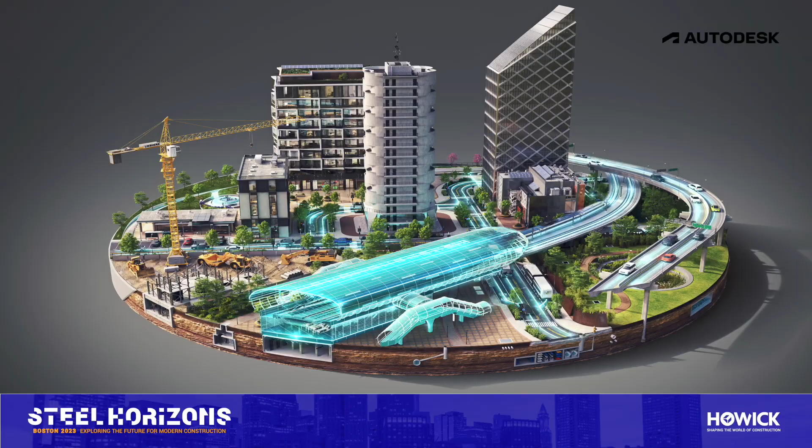Autodesk is changing how the world is designed and made. At Autodesk Research, we advance this mission by exploring new possibilities where others might see roadblocks. We are a diverse team of scientists, engineers, and industry experts, and we conduct industrial research to help our customers design and make a better world.

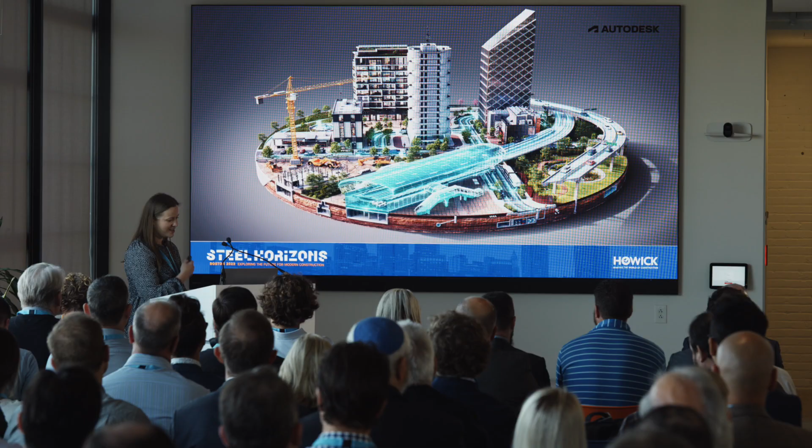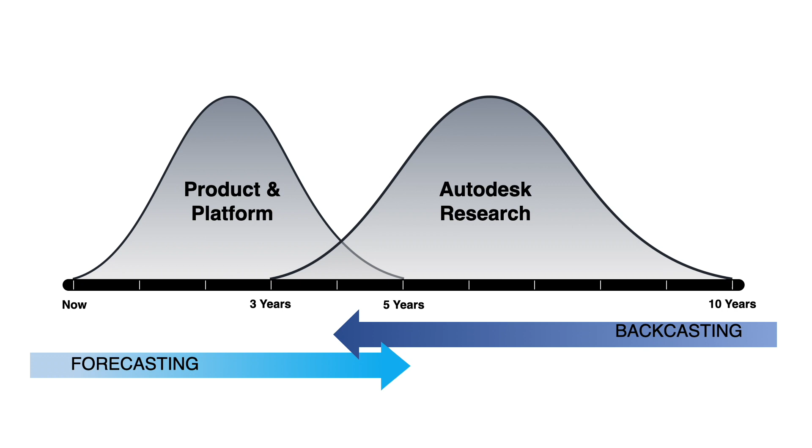So how do we approach innovation at Autodesk? Product teams are focusing on what our customers need now, working on a 1 to 3 year timescale. At research, we're setting our sights farther into the future, looking 5 to 10 years into technology which might still be far from widespread adoption. We use a process called backcasting, where we speculate multiple futures and then figure out the steps we need to take to meet the most desirable one.

In this research, we have multiple groups. Science groups develop new technology and engage with industry, technical and academic communities through papers, patents, and prototypes. The Industry Futures team, which I'm part of, takes the technology from the labs into the real world, working with customers on applied projects. These projects are never easy, there's always some workaround to be done, but the end goal is to produce a proper workflow for our customers. Then technology centers support external industry research, and we are in one of those downstairs.

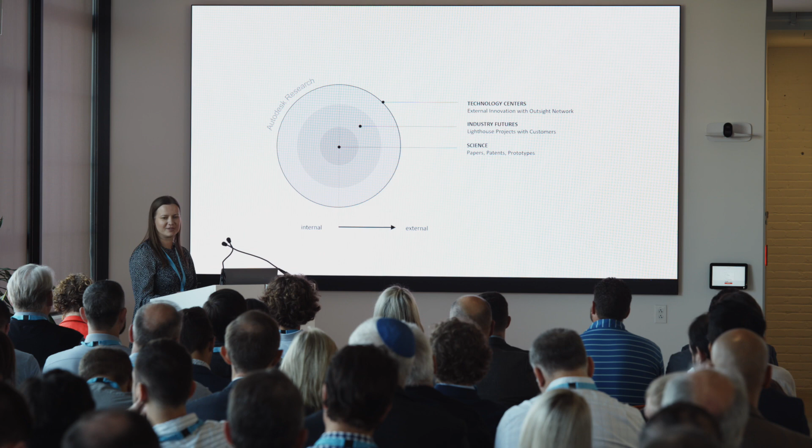Our partners, conducting their own experiments with their own set of problems, are supported by Autodesk spaces, not just spaces but also technology, software, and our experts. What's important is they provide us insights into emerging technologies, trends, and signals. The research engineering team, which develops this technology, allows us to easily demonstrate new techniques and innovations, so we can showcase this to customers and even our product teams. And the strategic foresight team looks more than 10 years out, trying to foresee what the future might bring.

The technology centers are home to world-class fabrication capabilities and are an engine for connection and collaboration. They're intended to bring a global innovation network to accelerate our research goals, like the convergence of design and manufacturing. To accelerate your research, anyone can apply to become a resident of our Outsight Network.

On-site residents get badge access to one of our three technology centers, where you get workspace like office space, access to machines, technology, software, and experts, as well as training and support from our great technology center staff. We also have global residency programs, a virtual network where you gain access to a virtual community, virtual talks, events, and the opportunity of networking with other residents and Autodesk staff.

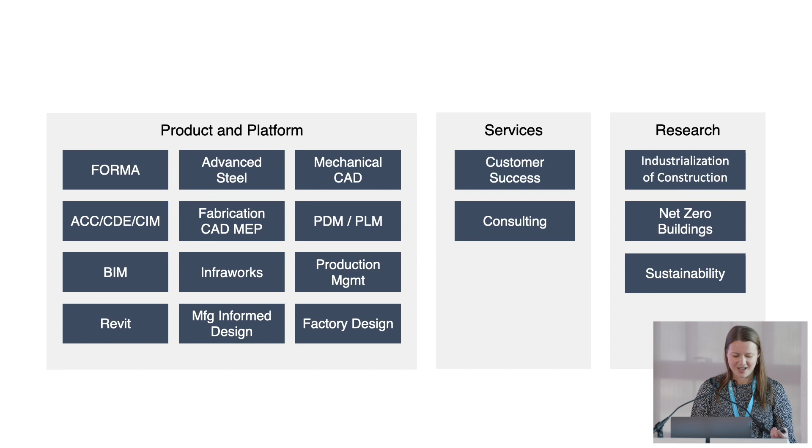Autodesk is committed to supporting industrialization of construction and, of course, supporting our customers in this transition, regardless if we're in product, customer success and consulting, or research. We offer a suite of products and platforms to support the many needs of IC applications and industries, from design to manufacturing to production. Our customer success and consulting orgs are there to enable customers to get the most out of our products, helping you find the best way of using them. In research, we're exploring the frontier of new technologies and practices. In blue is the Industrialization of Construction Focus Group from research.

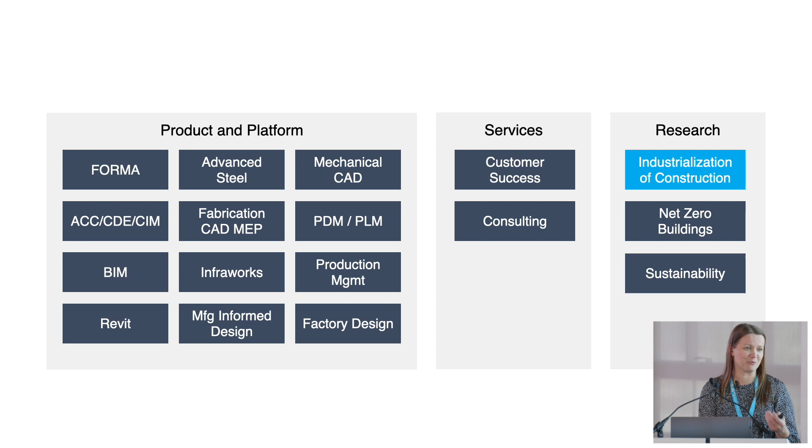Now let's take a look at some of our projects. Many of you, I think, are familiar with this project.

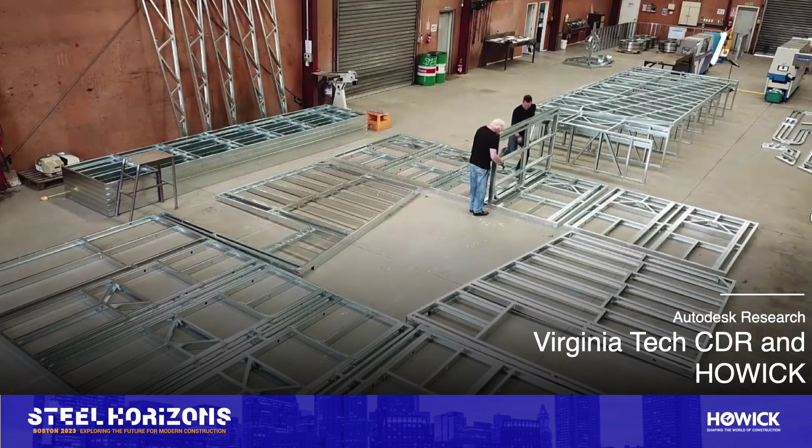The need for over 1,000 distributed healthcare clinics sparked a collaboration between Virginia Tech and Howick to redesign clinics, especially for control of disease spread. Howick's automated framing system was used to demonstrate that the primary structure can be produced and erected within one day, as opposed to several months using traditional methods. The initial design was constructed in Entebbe, Uganda, using local materials, and a similar system was utilized in constructing multiple mini hospitals in Zambia. Here you can see the design, the steel framing, and the external area - it's a bit like isolated wings around an external outdoor area, which has a triage and waiting area to limit cross-infection between patients.

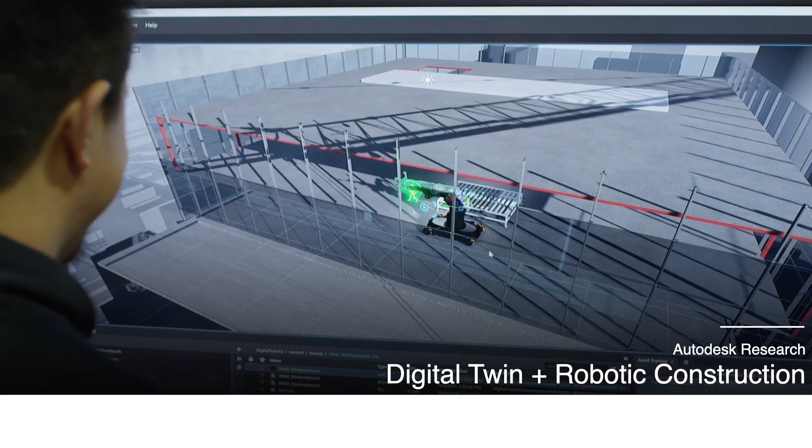The next project I'd like to showcase is the robotic digital twin. Our researchers developed a tool set which allows you to create a virtual environment for the robot and a virtual copy of the robot. Then you take the VR controller and you can manipulate the end effector of the robot.

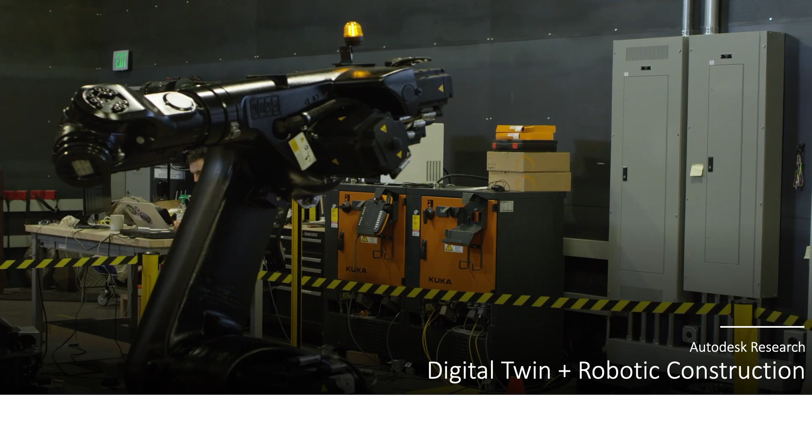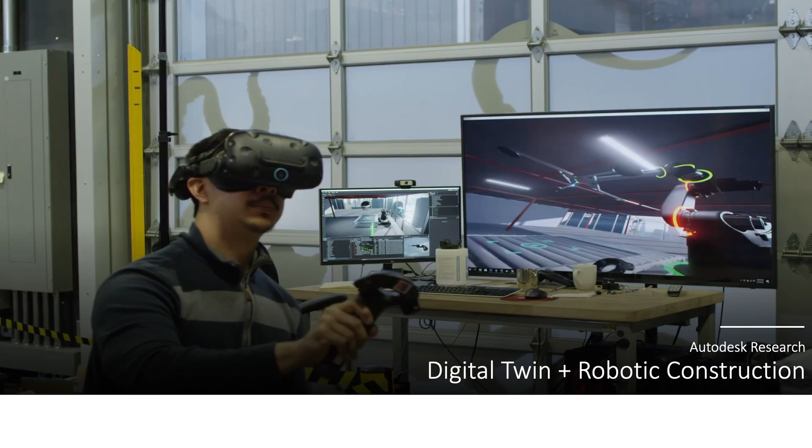Very complex movement of the robot arm can simply be calculated based on the movement of the VR controller. This process allows for intuitive programming of robotic movements, which prevents potential clashes with the environment, but also with other robots in a factory setting with multiple machines. The operator can control the robot by being next to it, but also remotely, from another town, another country, or apparently even another planet.

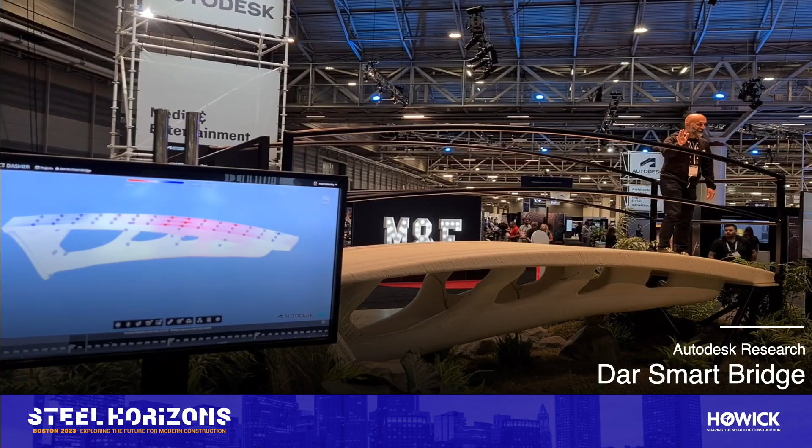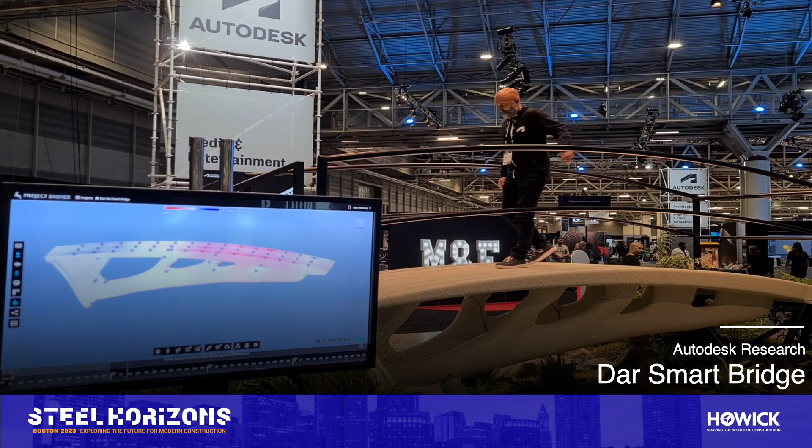The last project to showcase is the Dar Smart Bridge. Dar is a civil engineering company, and we worked together exploring how the robot can build its own infrastructure without any human input. The vision was to use decades of experience in building bridges and accumulated data to supplement our own knowledge in design and manufacturing.

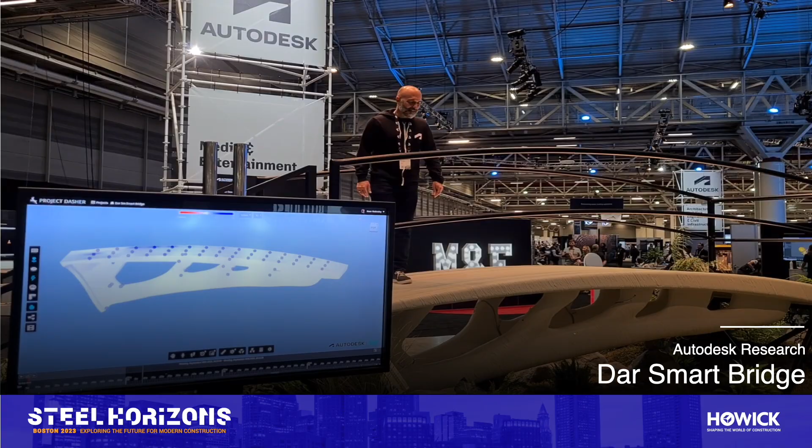Once built, the bridge would interact with its users and environment to understand how it's being used, and this knowledge would be fed back to a software to inform the next generation of bridge design. Through this project, we worked with our Fusion 360 colleagues to advance the capabilities of our software.

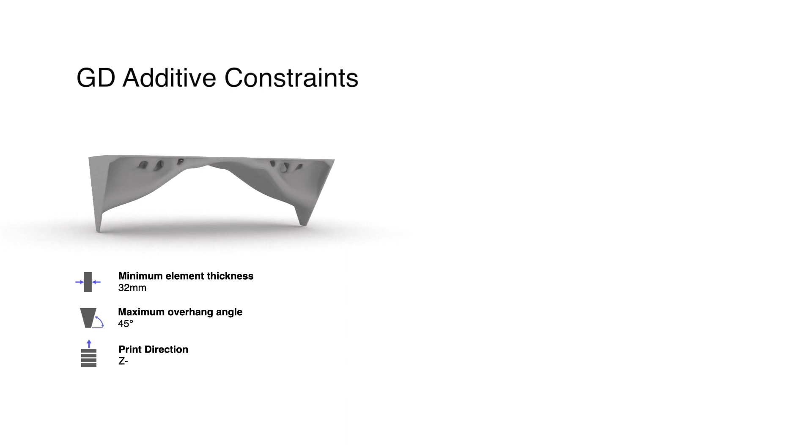The bridge was designed using generative design to reduce weight, but also, most importantly, to make sure it's actually manufacturable, using all the manufacturing constraints. In this case we had 3D printing, but there are other constraints like for milling or die casting, so you can choose another method if you wish.

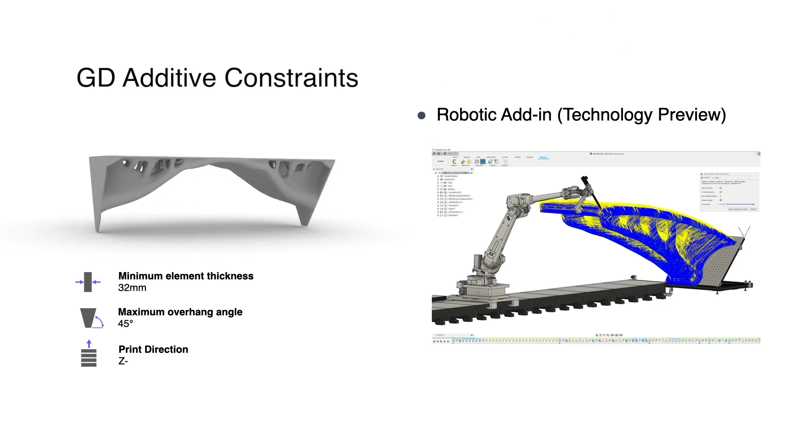The second thing we helped develop was robot simulation natively within Fusion 360. This allowed us to check the motion of our 7-axis robot over the million points which make the toolpath.

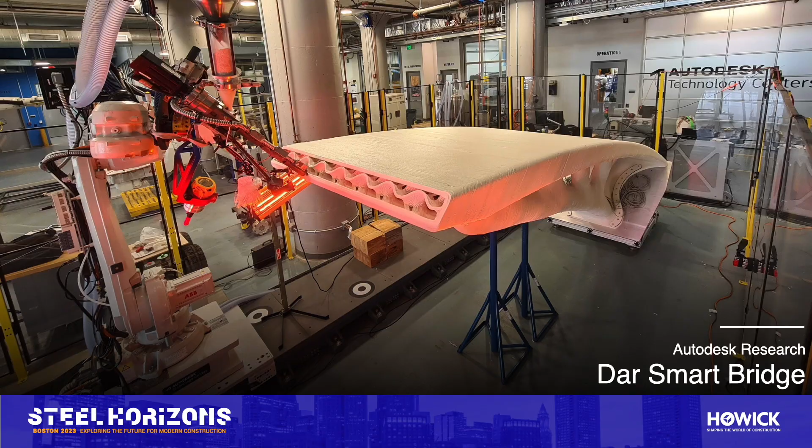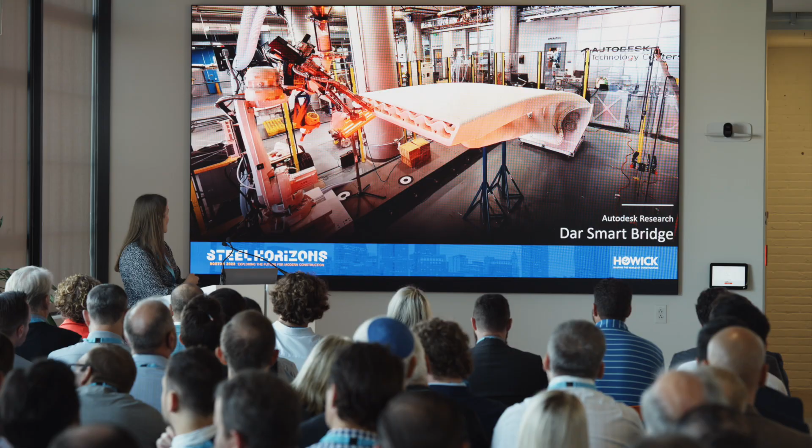The bridge was printed here in Boston, downstairs, which if you join us for the tour, you will see some artifacts from that build. Just to give you some statistics, it was 24 kilometers, or 15 miles, of toolpath, and the weight was roughly 960 kilograms. So these were the projects, and it's actually only a fraction of what is happening within research.

Now I would like to draw your attention to a recent deep dive into the construction industry. By 2050, the predictions are there will be 10 billion people on our planet, so the AECO industry must create spaces for this growing population, from residential buildings to critical infrastructure. We just haven't got a choice. We set out on a mission to explore how industrialization impacts the adoption and development of technology in construction.

So what have we found? Firstly, there is a huge demand for civil infrastructure, and this drives adoption of innovative technologies. However, the industry is struggling to keep up due to social, economical, political, educational, and environmental challenges.

Secondly, segregation makes it even harder to adopt IC technologies. We notice if the trade is individualized, it's easier to adopt these technologies. When more trades get on board, it gets harder and harder.

Thirdly, variation in supply chain. It's not only availability of parts and materials, but the inconsistency between them. You can have the same material from different suppliers, and it's not going to be actually the same. Disconnected production workflows is still a big challenge.

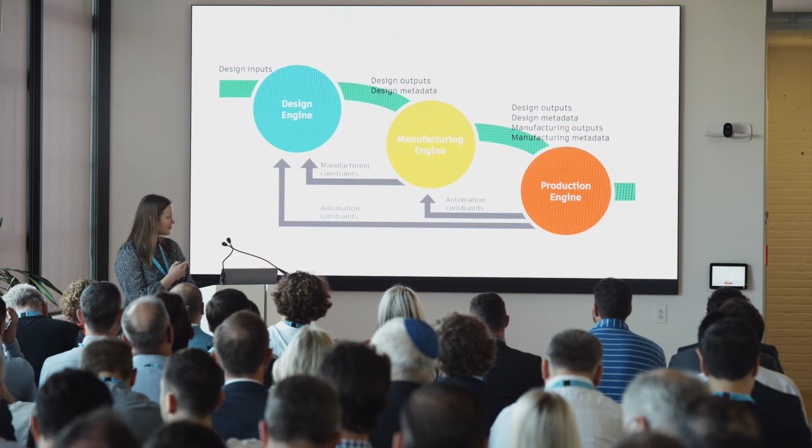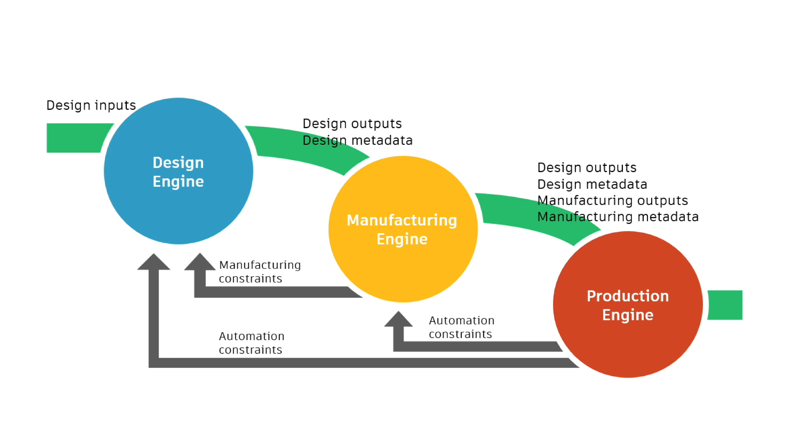So now to finish off, let me briefly tell you what my team and I are up to. Our vision is to ensure digital continuity in workflows from design to make in IC applications, tackling the disconnected workflows from the previous slide. The idea is to have three engines which talk to each other, exchange data, and at the end we get a design which we know is not only manufacturable, but we also know when and where it's going to be produced.

Now to truly finish off, that is our call to action. Please engage further with our work. You can follow us on social media, go to our website, check our blog, check our latest publications. If you're interested in applying for our Outsight Network, application information is there. But most importantly, we are here in large numbers, so just come and talk to us, and let's design and make better worlds together. Thank you.

Wonderful job, thank you so much Magdalena. Quick question for you: the work that you all are doing spans industries, pulling together convergence moments where we're looking at the interlocks between multiple industries and how technology is being used. But I think some of the most fulfilling work I've seen so far is also being done in partnership with customers. How would you agree with that?

That is the most important for us, especially for Industry Futures, which I've been part of. It used to be called differently, now it's Industry Futures. We've always been working with customers, and that was the most important and most enjoyable bit, because that's when you really can get that understanding. Reading websites and stuff is okay, and it's all what we do, but it's the customer who will give you the true drive to do your work.